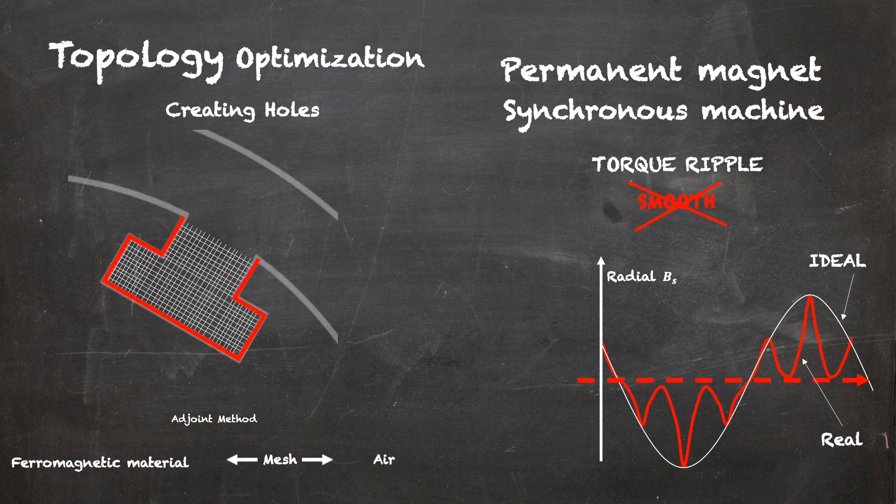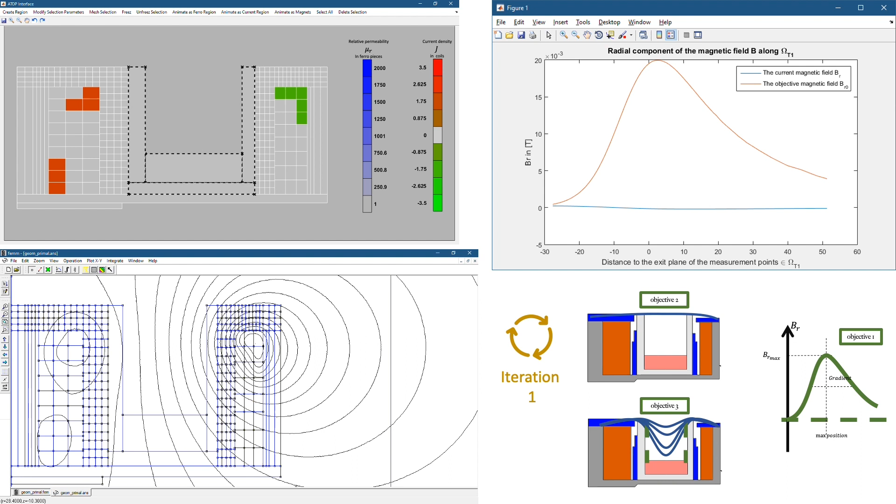In the last videos, we have talked about topology optimization and how it can lead to designs beyond the state-of-the-art. We have also demonstrated on the application of Hall effect thrusters that within only 1 hour, topology optimization has led to an original design that respects 3 magnetic requirements at the same time.

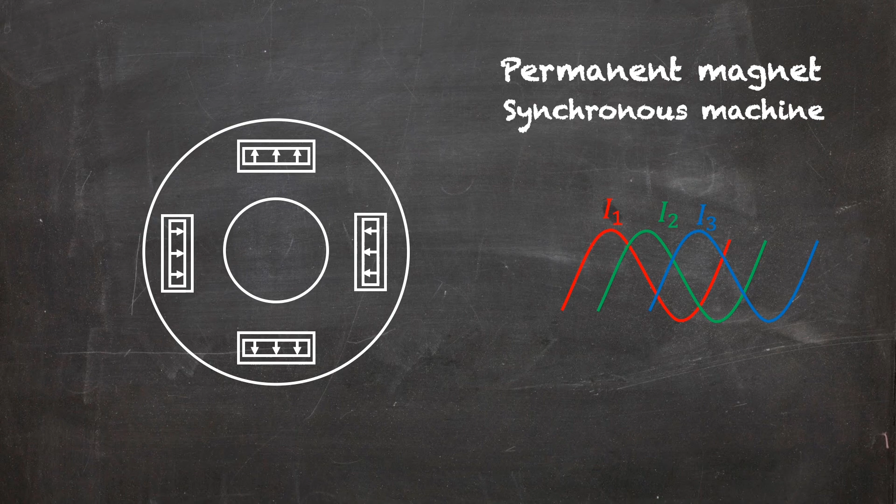In this video, we will be showing the potential of topology optimization on the application of electric motors and in particular on the permanent magnet synchronous machine. If you are not familiar with this application, please go back to our first video where we briefly explained how it works. Now, let's start by defining a series structure of an electric motor for our illustration.

In this structure, the magnets are drawn in yellow color, the coils are red, and all other blue areas represent ferromagnetic materials. Given the periodicity of the structure, we do not need to simulate the entire structure, but only 1/4 of it. This reduces the simulation time and speeds up the design process. This is a commonly used technique.

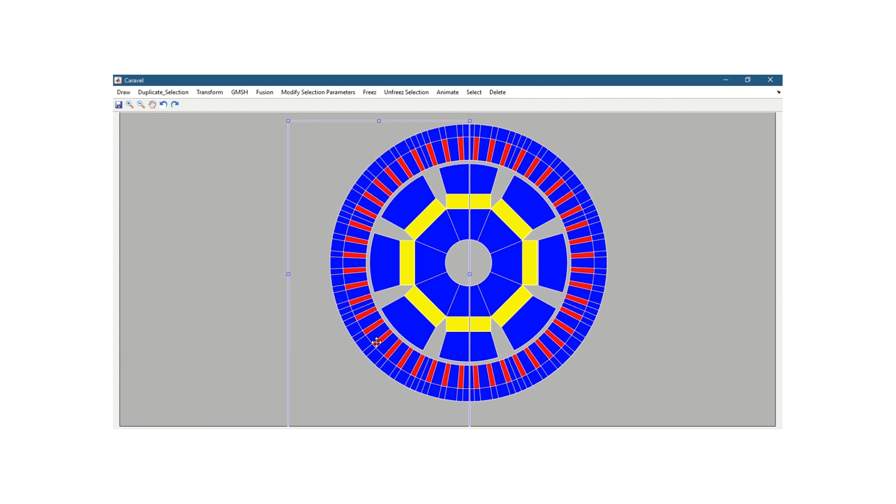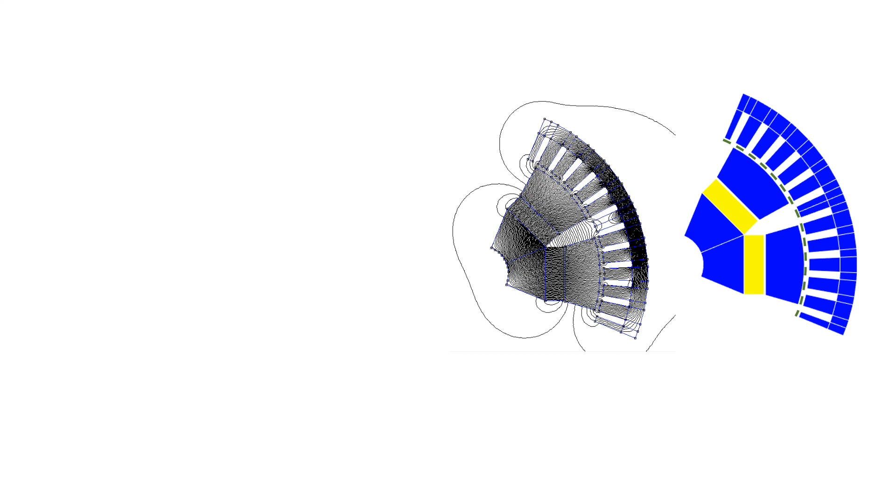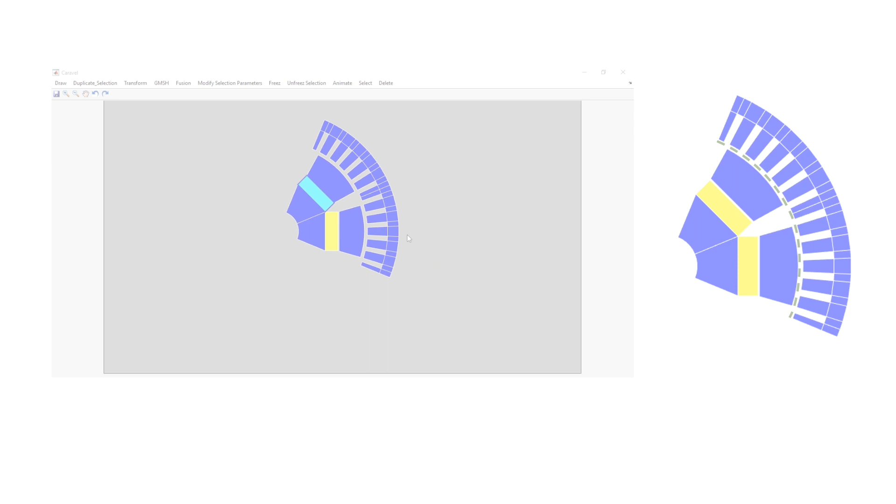Now, let's mesh the structure and make the optimization work. For efficiency purposes, we are going to first use the symmetry of the structure in order to define the problem on just the half of it. The other half will be defined automatically the same way. Here we have the possibility to design the whole structure, i.e. the magnets, the stator, and the rotor.

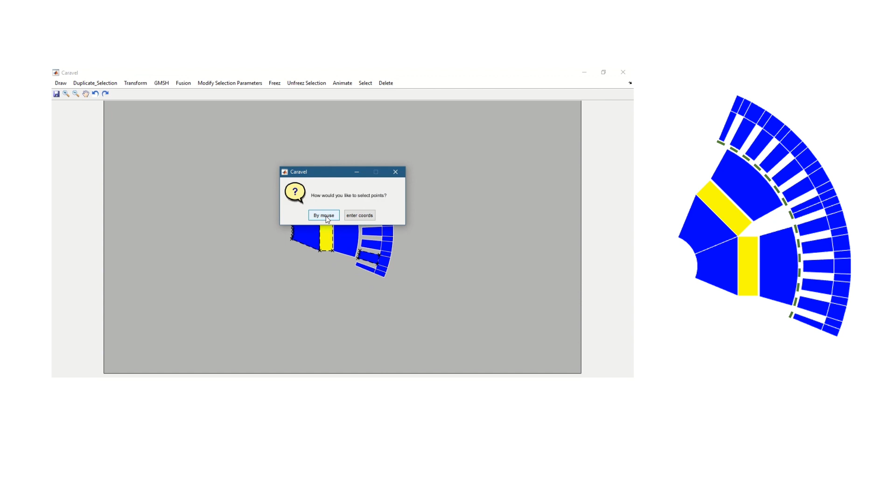But we are going to limit ourselves to only one part, which is the outer part of the rotor. That's why all the regions that will not be designed are drawn with a black outline, and only the variable region is going to be meshed. Here, every mesh of the exterior part of the rotor is a variable. We remind you that the purpose here is just to see the potential of topology optimization and not to have a solution to exploit. Let's go.

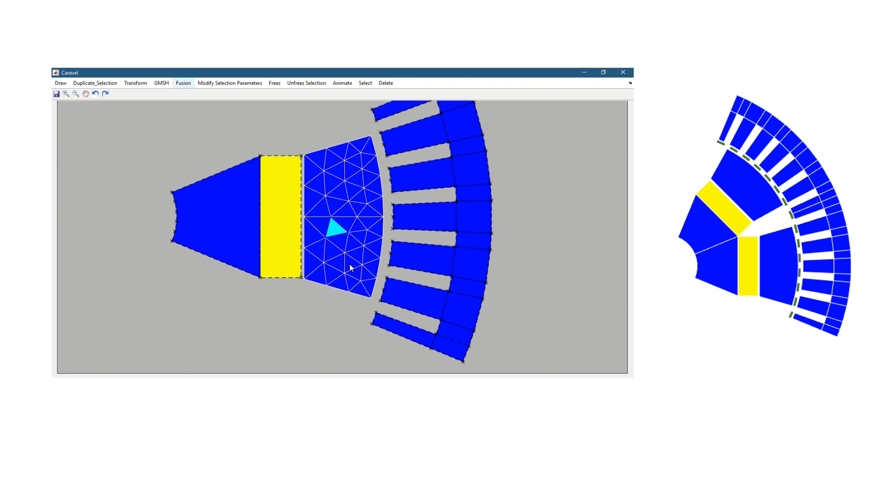As you can see, we start for now with a coarse mesh that we are going to refine afterwards. We recall that the blue color corresponds to meshes that are filled with ferromagnetic material, and the gray ones are void meshes. Here we show the changes that happen in each iteration during the design process. We show the obtained and the objective magnetic field, as well as their harmonic distortion, in order to quantify how far we are away from the objective.

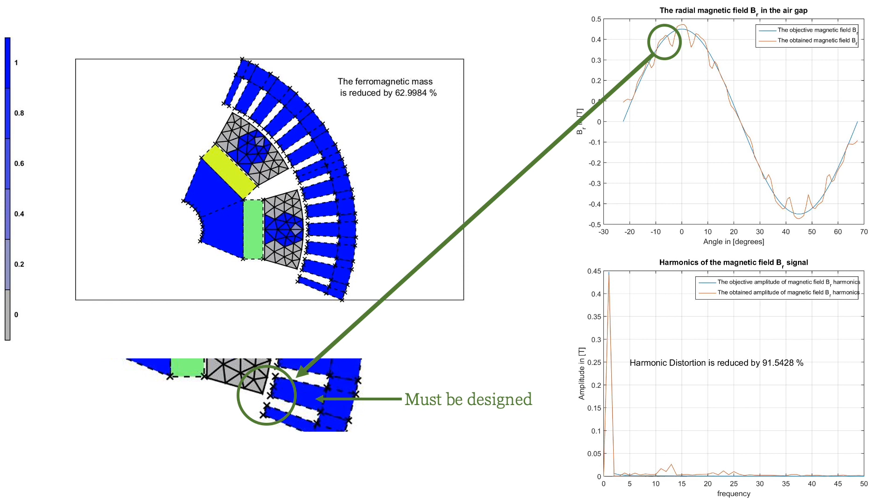We can see that in a few iterations, we already begin to have an idea, and the whole process has taken only 18 minutes. We see that the solution still will have undesirable harmonics, but they are due to the shape of the stator. There's no way to compensate for this by the rotor design alone, and in order to have a more appropriate solution, we have to reintroduce the stator regions as variables. But having the perfect solution is not the purpose of this video.

Let's now try a finer mesh. Here, the process will require more iterations. In this example, it took 80 iterations to converge, costing 1 hour and 38 minutes of computing time. We can notice that the design becomes more complex and more organic with a finer mesh. And this is where the power of topology optimization lies.

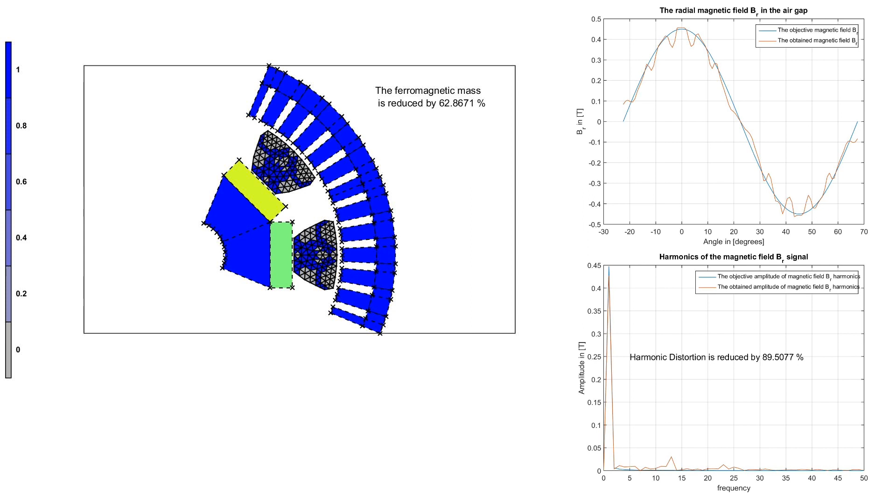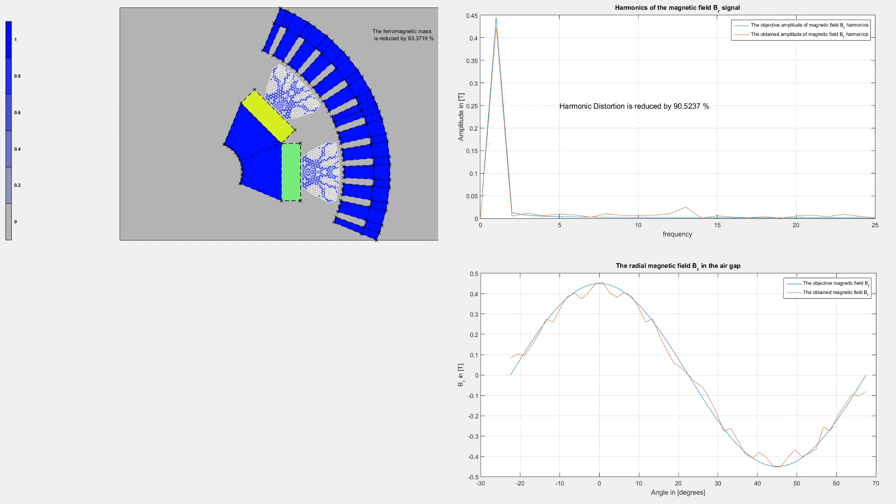And in order to give an idea of what this could look like for an even finer mesh, we've decided to put directly the obtained solution. It is more organic and more complex, but it's a high-performance solution in respect of the objective. Feasibility or manufacturing issues of those solutions are included in post-processing stages. We have decided to not include them, but in order to have an idea about how it works, please go back to our previous video. Given these designs, we hope to have shown the interest of topology optimization.